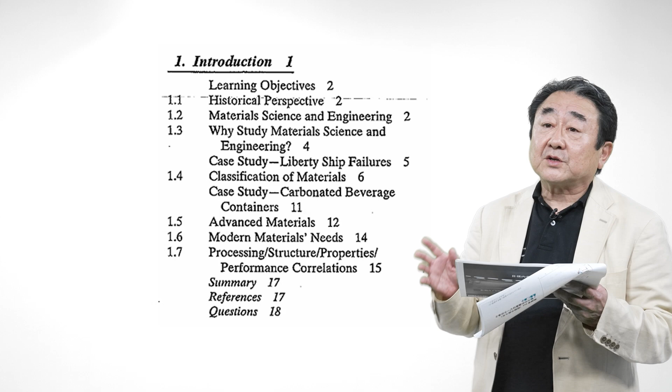Shall we look at the table of contents? This is the first chapter, and the first chapter is introduction. I will explain this chapter in detail later. Important keywords were processing, structure, properties, performance, and their correlations. Once again, processing, structure, properties, and performance. So this is the basic attitude of material science.

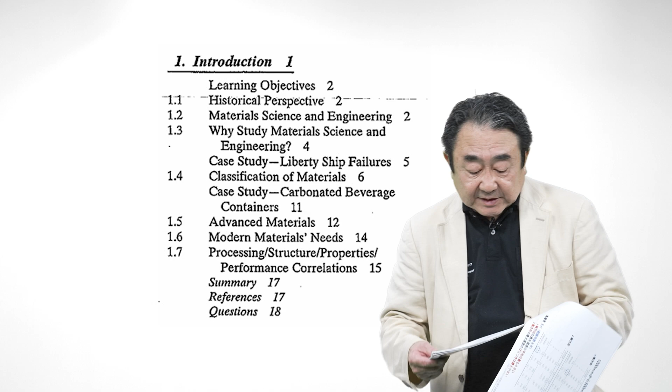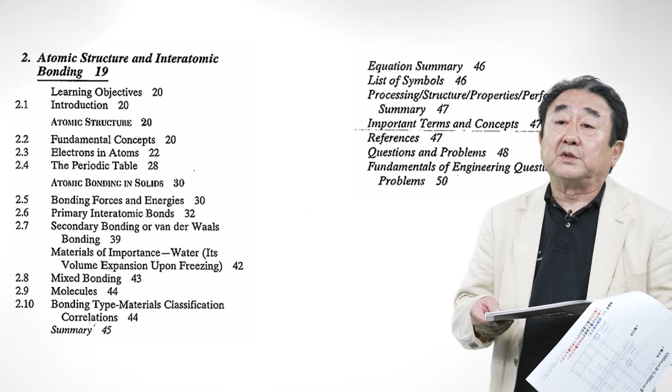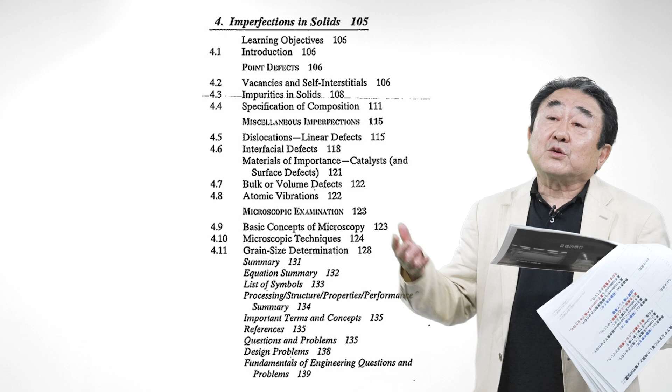This is the second chapter. The second chapter is atomic structure and interatomic bonding. This is a very, very microscopic view of the materials. And then this is the third chapter, the structure of crystalline solids. In this chapter, crystal is explained. That is larger than the atomic in the previous chapter. Chapter 4, imperfections in solids. This is a larger scale, macroscopic view of the crystal.

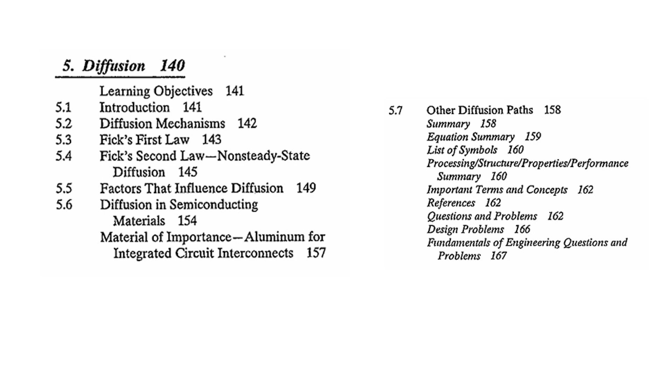And then chapter 5 is diffusion. Diffusion is a very basic phenomenon, as in the case of water diffusing into solid soil or something like that. And in the material science case, one material diffuses into another material. That is the diffusion phenomenon.

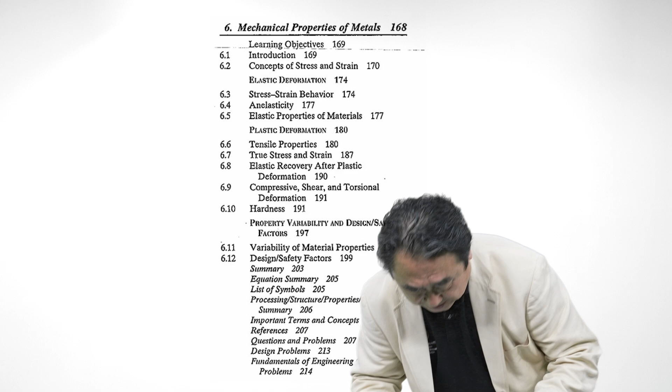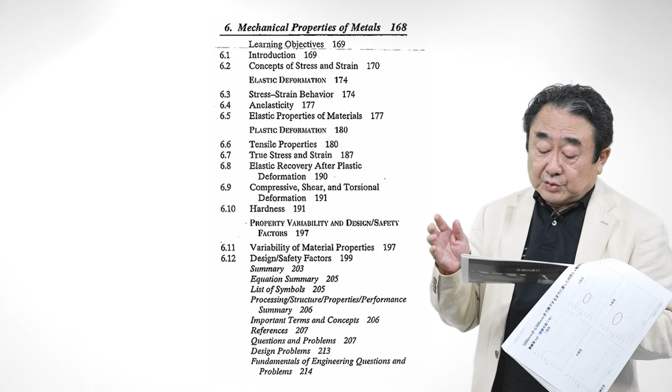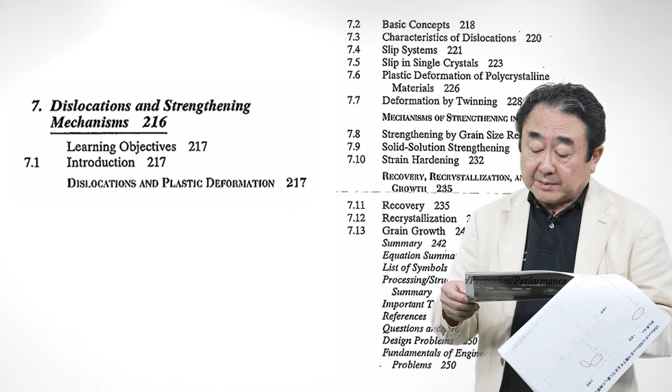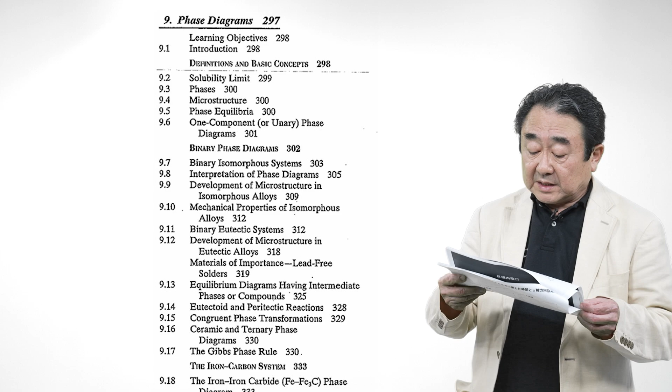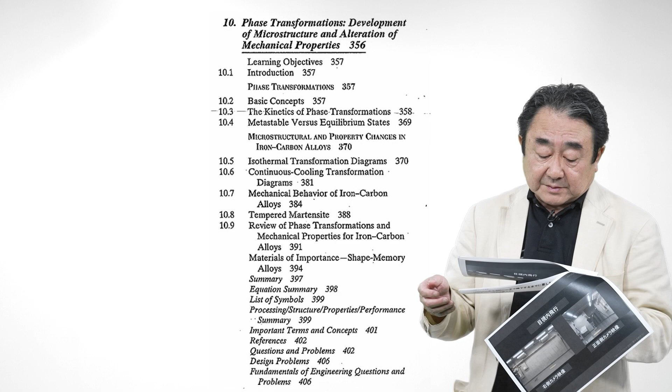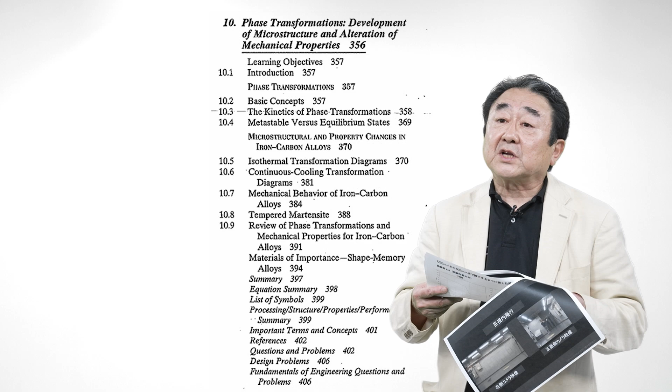And then chapter 10, title is phase transformation. How to change these different phases. That means metal material changes. That is transformation. But this chapter is also about metal material.

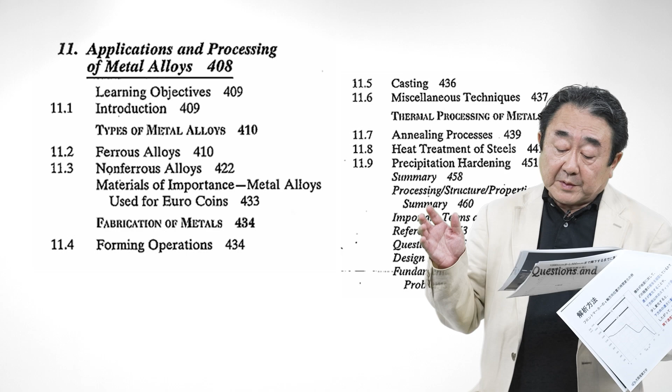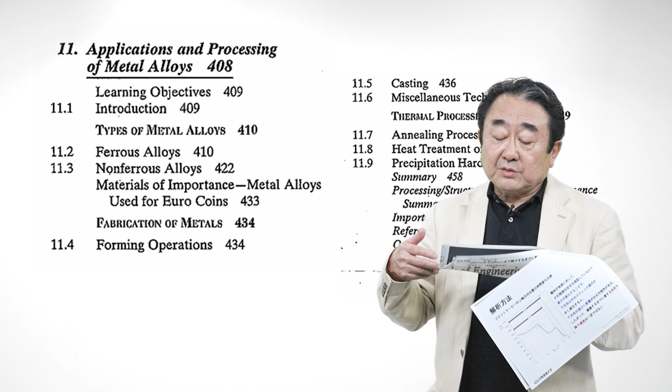And then chapter 11, applications and processing of metal alloys. A metal alloy is two different materials mixed together. So here we can understand the application of the metal, how to make products from the metal; processing of metal alloys is described in this chapter.

And the next chapter, chapter 13, applications and processing of ceramics are explained. Chapter 12 is structure and properties. So important keywords in material science: structure, properties, processing, application. Application includes the performance. So structure, properties, processing, performance, and correlation are the basic material science attitude.

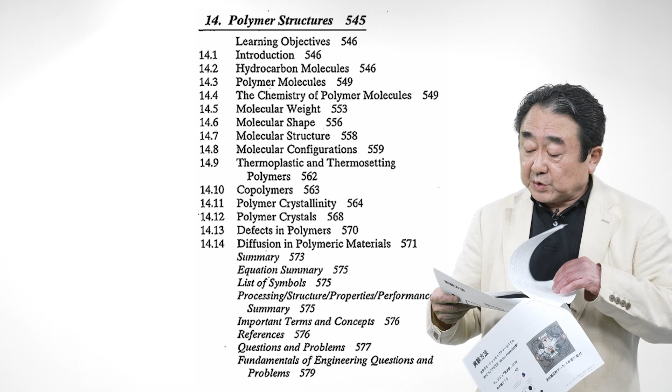And then, shall we look at chapter 14, polymer. So in chapters 12 and 13, ceramic materials are finished. Only 2 chapters, and ceramics are finished. And then next is polymer, polymer structure. Materials moved from ceramic to polymer. Metal used 10 chapters. Ceramic used 2 chapters. Big difference between them, metal and ceramics.

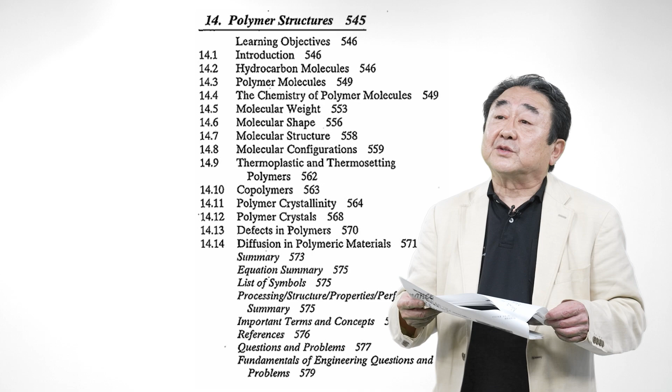And chapter 15 is characteristics, applications, and processing of polymers. Metal, ceramic, and polymers. These are materials. However, my lecture is related to composite materials. Until chapter 15, there is no composite. Composite materials are not described yet.

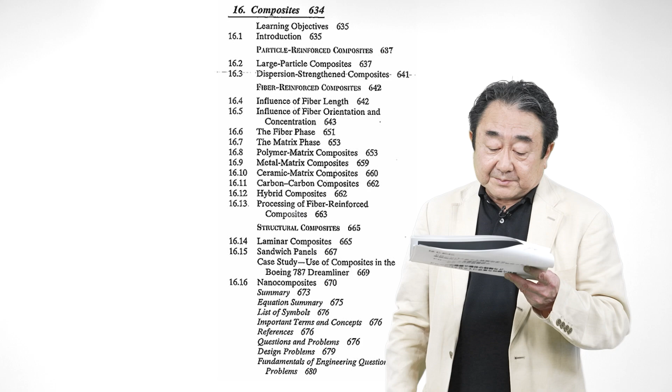And then, in chapter 16, we can see the composite. Title is composites, just composites. We meet the composite in this textbook for the first time, but this is strange. As I mentioned before, the basic concept and keywords are structure, performance, processing, and application. There are none of these words in this title, only composites.

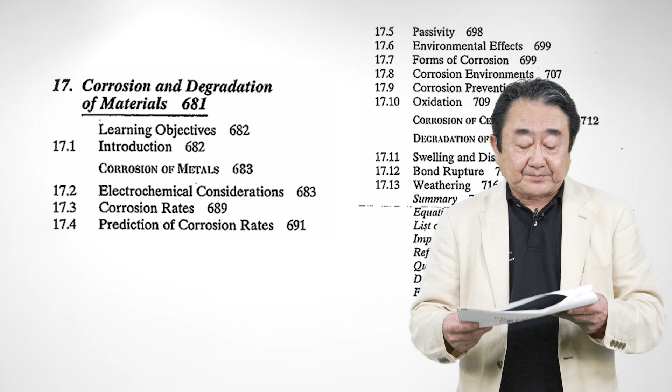And then, shall we look at the next chapter? Chapter 17 is corrosion and degradation of materials, not composite materials, of materials. These words, corrosion and degradation, are related to the long-term usage of the materials. So, of course, that is a very important point. But in this chapter, not only metal, but also ceramic, polymer, and composite are described together. All the materials are described regarding corrosion and degradation.

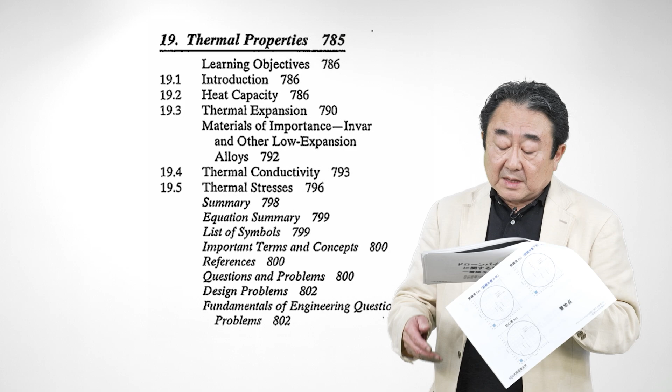And chapter 18 is electrical properties of all the materials. Chapter 19 is thermal properties. Corrosion, electrical, thermal, these are one category, the performance of the materials. And then what is next? Next is chapter 20, that is magnetic properties. And then 21 is optical properties of materials.

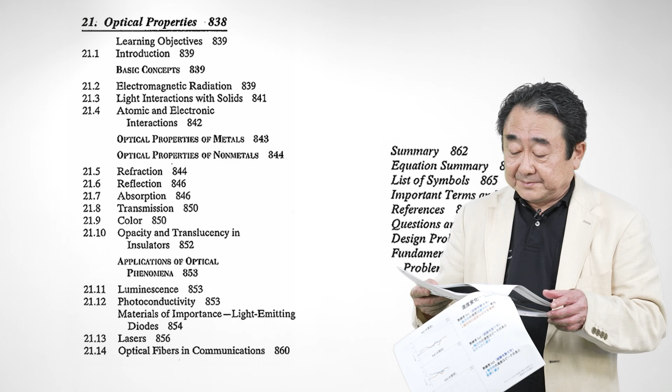And 22, this is the final chapter of this textbook, economic, environmental, and societal issues in materials science and engineering. Economics is a very important issue. Environment is also a very important issue. Materials are used in our society. So social issues are also very important.

This book, Material Science and Engineering, has a total of 22 chapters and a total of 939 pages. Very big book. That means material science has very wide aspects, including metal, ceramic, polymer, and composites.